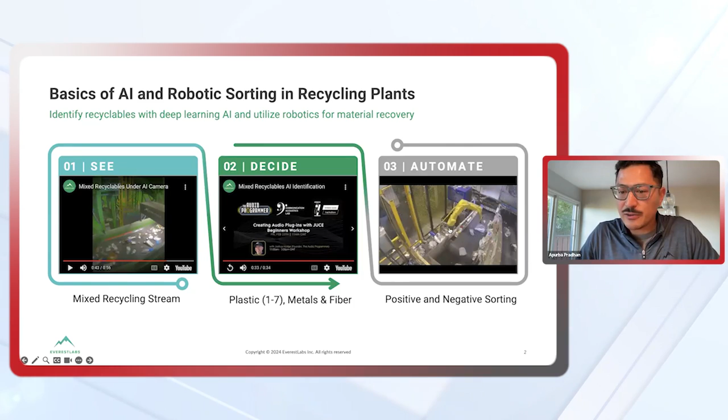What you're seeing here is our current generation of robotics—six-axis robots that mount to the side of a conveyor belt, which you can program to do various things. At the highest level, you're either doing a positive or a negative sort: taking out contaminants, which is a negative sort, or picking good objects from the material stream, which is a positive sort. Through that, you're figuring out where you want to drop those objects and what priority you want to pick objects on a line.

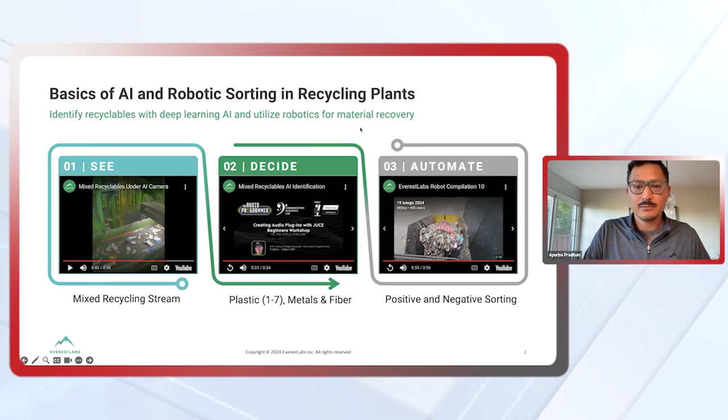So the robotics are taking the sorting and automating it, and we'll go through what types of tasks the robotics are now really good at, and what are some emerging tasks. I wanted to lay out, from our experience, practically what are some of the common tasks robotic sorting is doing today, and what are some emerging tasks we're seeing robots being asked to do. The common tasks are around QC of plastics, metals, and fibers after they've gone through one level of sorting.

Basically cleaning up the material stream going into balers. Robotics are also quite good now at installing into last-chance lines and residue lines, recovering any additional material that was either missorted or not sorted in the MRF. Robotics can go in front of balers and clean up the materials, doing one more level of cleanup before it goes into the bale to meet some of the purity requirements.

We also deploy robotics in reclaimers—companies that are buying feedstock, either containers, bottles, or packaging, that needs to be sorted. They do a level of sorting before it goes into their process, and robotics can go there and clean that up. So those are the everyday tasks we're excelling at and have very good experience with.

Some of the emerging tasks on the right-hand side are areas where robotics are starting to be deployed and starting to get good at. Removing film and flexible plastics is one of them. Ejecting batteries out of material recovery facility streams, where they could cause fires, is another task. Removing explosives.

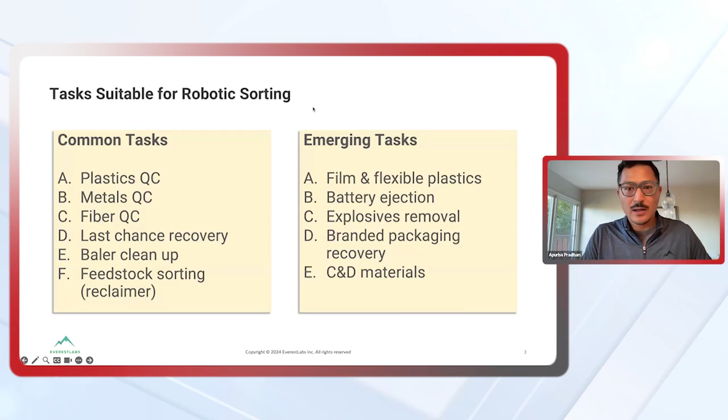As I mentioned, we have a very, very flexible robotic cell. And what that means is these are small form factor, high-speed sortation robotic arms that install pretty much anywhere in the facility with very, very little cost to retrofit a line. You see here the picture on the left-hand side. We can install on incline belts. We can even install over belts if there isn't a platform to install the robotics on.

The picture here on the bottom side shows it can go in a very small linear space constrained system. So a lot of times QC lines, there's very little space to install large robotic systems on. We can install in a footprint of about 2 foot by 2 foot on a pedestal on the ground to be able to provide sortation right after optical sorters. So extremely simple. Flexible robotic cells.

They're also very configurable, right? If there's a task where there's a lot of objects that need to be sorted and one robotic system is not enough to do it, you can install two across the belt from each other. You can even install them serially one after another. So you can cover a lot of ground with these types of robotic cells.

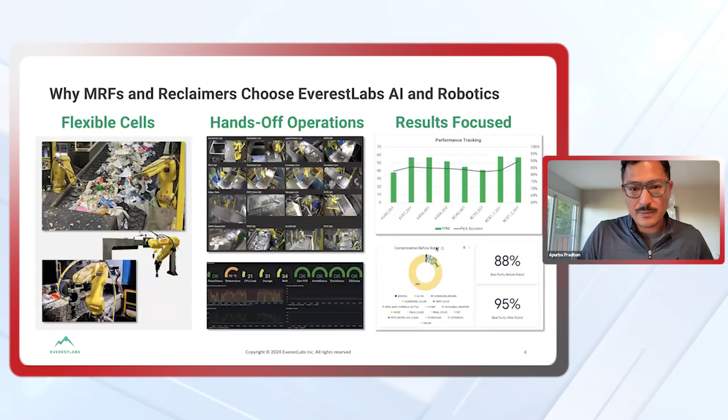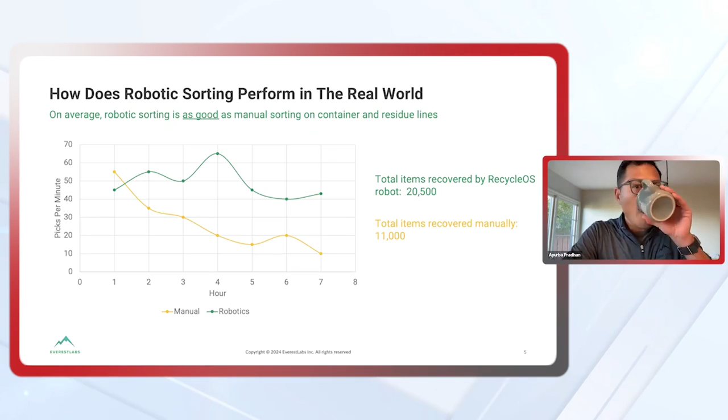With that, I'll hand it over to Samir to talk about real world experience with robotics, what the true costs of robotics are, and what the true costs of manual sorting are, so that we can do a comparison later on. Thanks, Dian. Thanks, Apurba. So let's look at how our robots perform in the real world.

But as the day progresses, the efficiency of the sorter starts to reduce. And that happens over the course of an 8-hour period. However, with our robotic system, we have seen that our robots are up and running and can sort up to 65 picks per minute.

And it's always available. So the sorting of the robot depends on the availability of the material, while the performance of the robots is constant, while the manual sorters' performance, or productivity, continues to go down as the day progresses. So on average, our robot is as good or even better than manual sorting on container and residue lines.

Just doing a quick analysis from this chart, we've seen that our total items recovered by our robots could be somewhere in the vicinity of 20,000 objects in an 8-hour period. Similarly, items recovered manually are nearly half of it, or about 11,000.

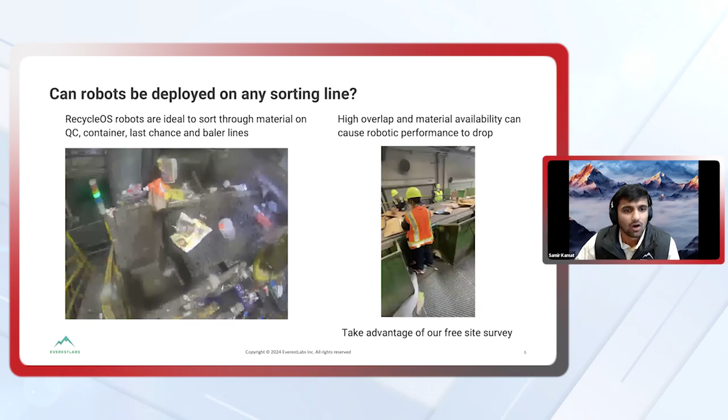Now, a line like this one is something challenging for our robots to go on today, right? Because our camera systems can only see material that's on the top, and cannot see what is hidden under a large piece of cardboard. And as you can see, the sorters here are working really hard to clean this material up. However, having said that, our robots are ideal to sort through material on QC, container, last chance lines, as well as baler lines.

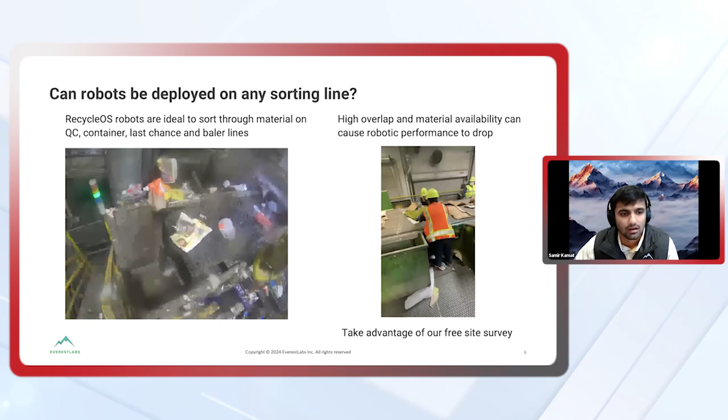And you can see the robot working here on a color HDPE QC line, where it's doing up to 60 picks per minute and has successfully recovered 52 items out of the 60 attempts. And that marks our robot efficiency at 85%. So as long as the material is well spread out and is visible to the naked eye, we can guarantee that the robot can identify it, detect it, target it, and successfully recover it more than 80% of the time. Next.

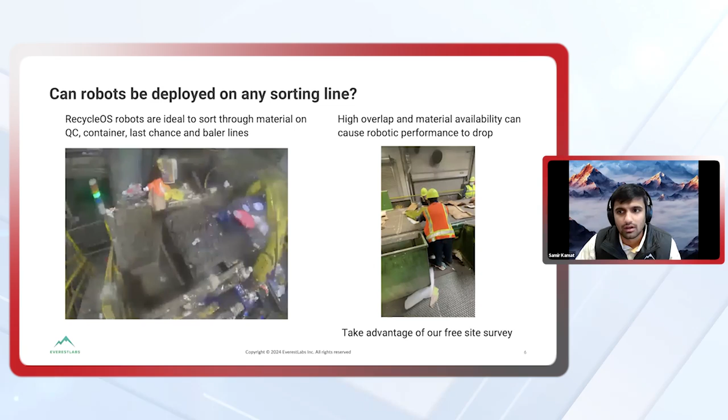Okay, so let's talk a little bit more on what are the factors that impact manual sorting cost. For simplicity, we have subdivided this into 4 different categories. The first is the labor and overhead. So a salary of a sorter could be anywhere between $40,000 a year to $100,000 a year in the US, depending on location and function. And the overheads could be anywhere between 20 to 40% for benefits, social security, insurance, and you can add another 5 to 10% for workforce injury or illness that could impact the business.

Similarly, employee turnover is like a 30 to 40% turnover rate, and each employee costs approximately $5,000 to hire. And sometimes temp agencies can charge 25 to 50% more. The third one is number of shifts, and this is an extremely important factor in how the manual sorting is calculated, because a typical recycling facility needs 2 sorters in a 2-shift plant, needs 3 sorters in a 24/7 or 24/5 plant, but just one robot is enough to sort through the line throughout the day, right?

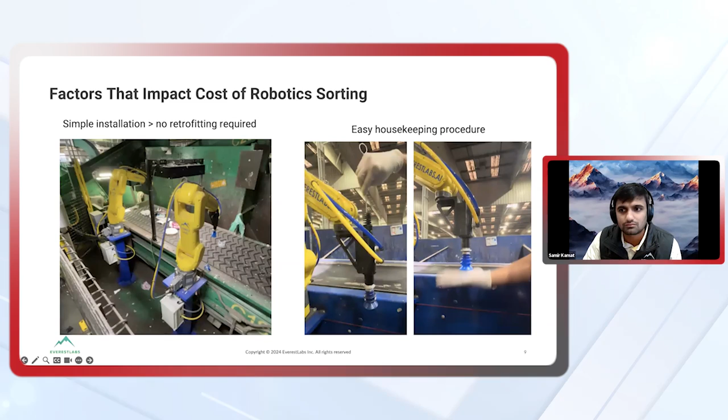So once we have set up, and you can see how easy it is to set up from this image on the left here, once the robots are ready to go, all we ask is you clean the end of arm tool once a day, and you replace the suction cup once a day. Again, we provide the bottle cleaning brush, we provide the suction cups to you. All we ask is 30 seconds of your time to make sure that the robot end effectors are clean, and really they're ready to go to get best recovery. Next.

Thanks, Samir. And hopefully the last few slides that Samir shared help you picture what a robotic install may look like. Because if you don't have direct experience with running these systems, it's hard to imagine what it would take to purchase, to install, to run these systems. So hopefully the last few slides made that a little bit more clear for you. What I'll go into next is the economics of running robotics, and I'll take a few real world examples and walk through it with you so that it's very clear.

And these economics are based off of our robot as a service model, where, as Samir mentioned, it's an all-inclusive service that includes the hardware, the software, the data access, as well as the maintenance and the replacement parts that are needed to run these robots efficiently. So this comparison here is for a 2-shift plant. This is a robot that's doing a quality control task, so essentially picking out contaminants from a line. It's a single robot replacing a manual sorter on a 2-shift plant here.

So the average sorter salary here in this facility is $25 per hour, which is roughly around $50,000 per year for that sorter. Now, as Samir mentioned, this is one sorting position. So if you're manually sorting here, you need 2 sorters in the course of 24 hours to man this sorting position. And I've assumed here a 30% burden rate. This is the amount that companies are responsible for outside of the hourly rate that you're paying the sorter. This covers insurance, this covers benefits, this covers all of the Social Security type benefits that need to get paid out.

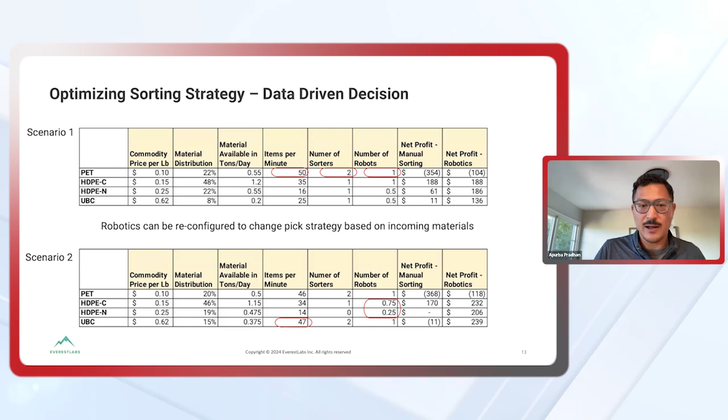And these are all configurable. Once the vision system and the AI is running, this data is available to you in a very granular fashion, so you can make strategic decisions around how you run your operations. And with that, I'm going to turn it back over to Samir just to talk holistically about AI and robotics and MRFs.

Samir, you might be on mute.

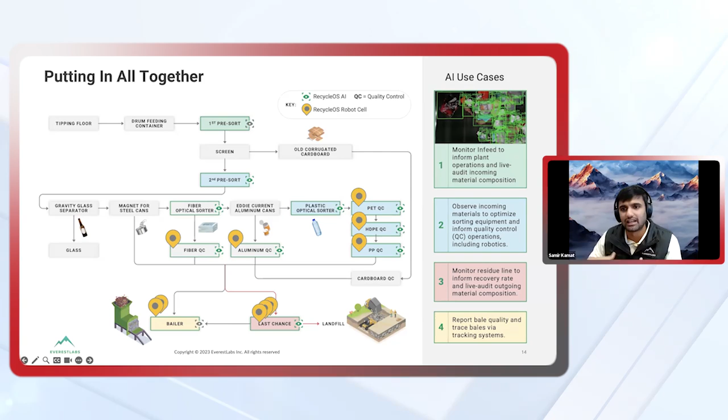Thanks, Apurba. So let's visualize the flow of material in the MRF. Everything starts from the tipping floor, where the material comes to the first pre-sort station, right? And we have pre-sort stations in the MRF. We recommend adding vision systems at these pre-sort stations, so you can monitor what is actually coming into the plant, right? And you can get this material composition of everything that is coming in and that needs to be sorted.

We are potentially looking at highlighting some materials such as detecting batteries, fire extinguishers, propane tanks, anything that shouldn't be there, and alerting the team on site to remove that material before it goes through further sorting. So we can start with vision systems on the pre-sort line, and as I discussed before, we are working on getting robots to be there, but they are not there yet as of today.

The material then goes through different kinds of equipment, right? It goes through glass separators, magnets, optical sorters, eddy currents, and these are all must-have equipment in any MRF. What follows this equipment are all the QC lines. So typically any MRF would have 3 kinds of plastic QC lines, and then a few other fiber QC, as well as an aluminum QC line.

And at all these QC stations, we have seen that it is just an ideal position to deploy our robots. And depending on the number of shifts the plant is running, you could be replacing anywhere between 5 people on QC lines in a 1-shift plant to 15 people in a 24/7 plant, right? So that's big cost savings for the business as well. Finally, all the material that is sorted at these QC stations goes into the bunkers or the silos, and then all this material goes to the baler.

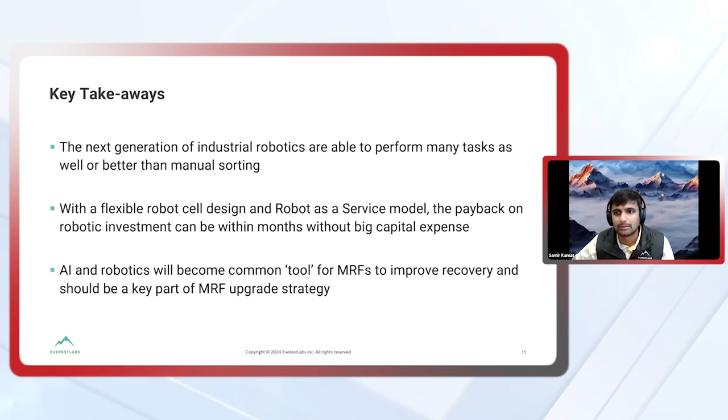Apurba, I think you're on mute. Oh, sorry. Thank you, Samir.

Just wrapping up here with some of the key takeaways. As I mentioned, industrial robotics in material recovery facilities is at this point in its second generation. It's able to perform many tasks well, at least as good as manual sorting. And with flexible robot cell designs and this robot as a service model, the payback on the investments can be very short. So hopefully that was clear through this webinar.

And we believe that AI and robotics will become a common tool for MRFs to improve recovery as a key part of upgrading MRFs, for lowering costs, for increasing recovery rates, to keep up with a lot of the requirements that EPR laws and other recycling policies are placing on MRFs. AI and robotics will become a key tool.